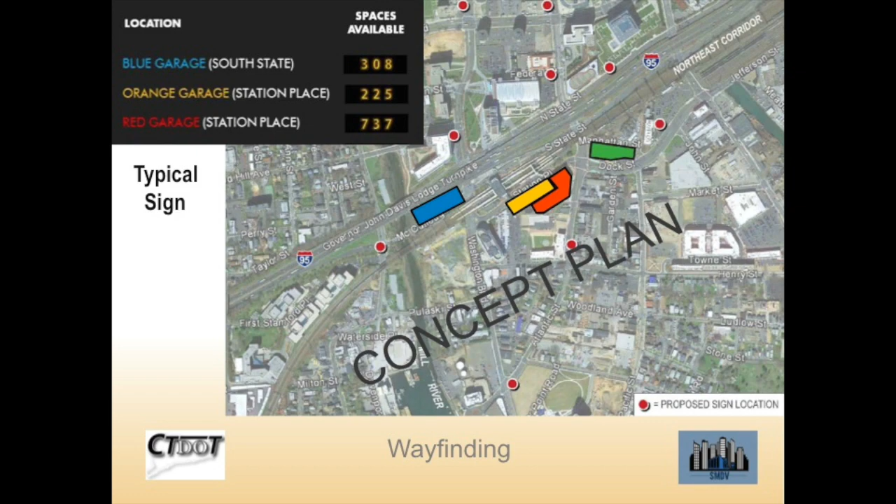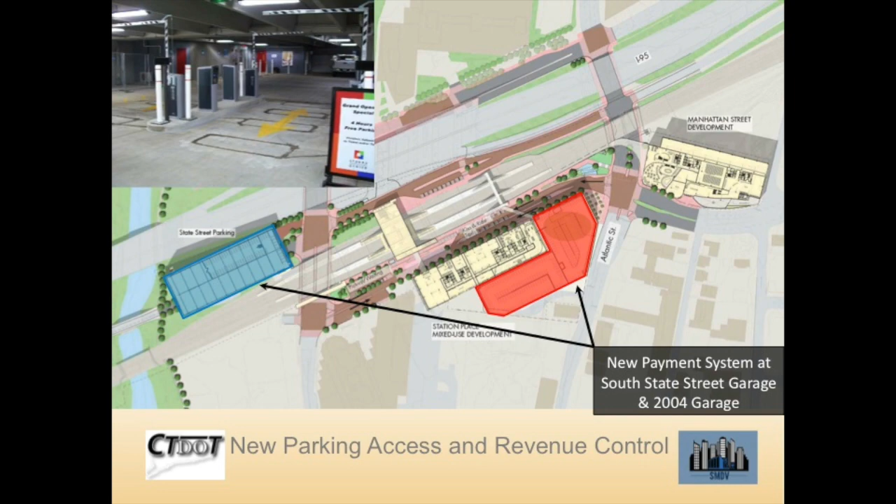There's going to be new payment systems. The system we're looking at is designed and developed by Amano McGann, which is, from what we can determine, probably the best and highest technology in terms of parking systems in the world. We spent a lot of time looking at different systems. We chose theirs, and DOT can speak for what they think of it, but obviously they chose us because of that being a primary consideration.

We believe what we end up doing here is improving traffic circulation around Station Place. We're going to enhance bicycle and pedestrian access, and a lot of what exists today in terms of pedestrian vehicular conflict, I think, will be eliminated in the way that we're going to redo the streets as we complete this project.

We're going to increase the kiss and ride spaces from the existing to 32 spaces, which is about double what exists today. And we're going to enhance the taxi and pickup area. Bicycle storage will be enhanced with 50 new spaces for bicycle storage, and we'll be providing 10 electric vehicle charging stations.

South State Street is going to pass through the garage. South State Street will never be closed during construction. There will be temporary times where I'm sure in the evening there are going to be some inconvenience, but it's going to be minor, and it's going to be done at night to ensure that we're not interfering with commuter traffic at all.

There are going to be intersection improvements made at each of the intersections that are identified here. And these are going to be as required by OSTA.

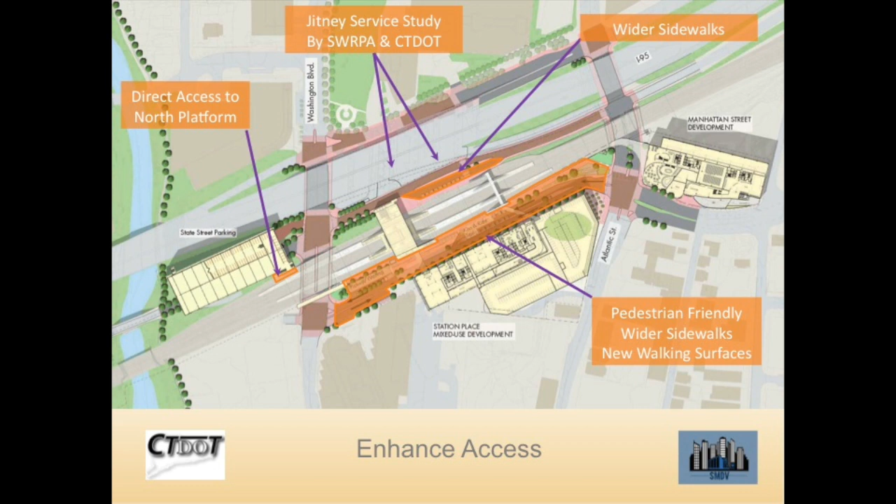Extended kiss and ride facilities will be included on both sides of the station where they are today. Again, both areas enhanced with wider sidewalks, canopies, and up to a total of 32 spaces, which is about twice what exists.

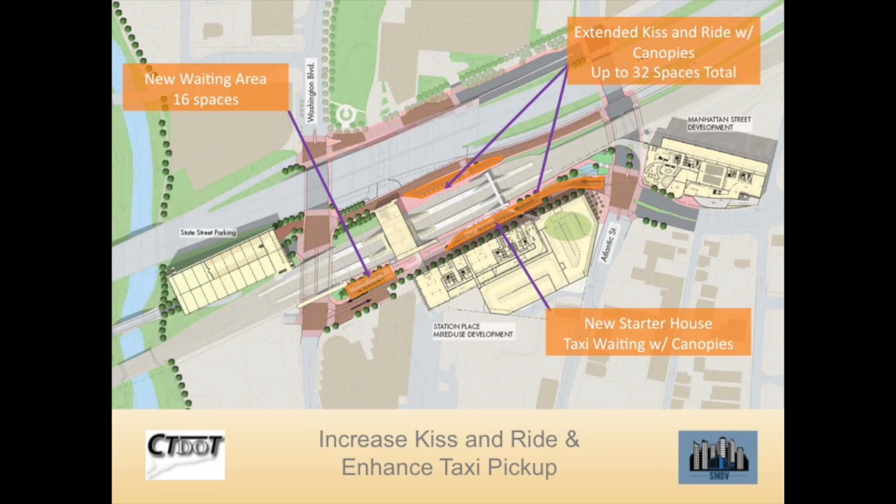We're going to make accommodations for bicycle access to the future Mill River Trail. We don't know when that's going to be completed, but we are clear on the fact that we want to be able to connect directly to it.

And bicycle access to the station in all areas, so that bicyclists can feel comfortable getting in here. As I said, there are going to be 50 new bike stations for them to park their bikes, so it'll accommodate a lot more than what it does today.

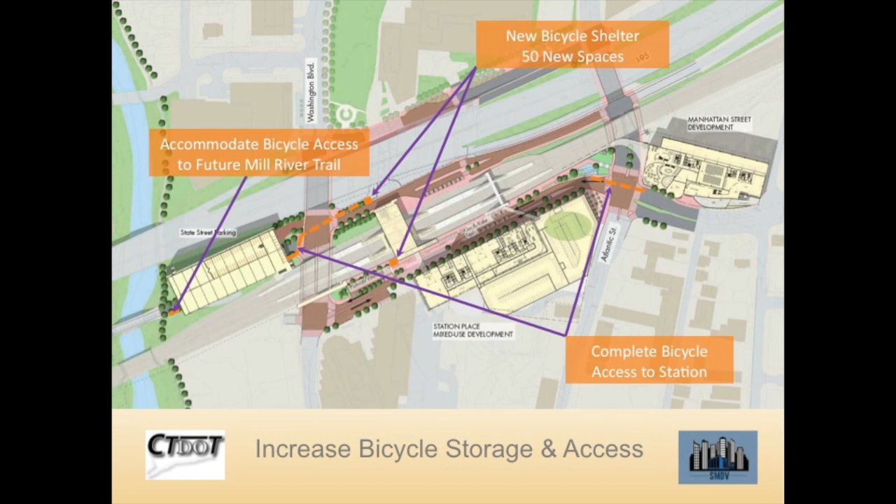Again, the bicycle shelter stations will be in these two areas. Electric charger stations, we're going to have 10 of those. I've talked to a lot of transportation consultants - this is where the market's going to go. There's going to be more and more need for these, and we're going to start with the 10 and see where the demand goes from there.

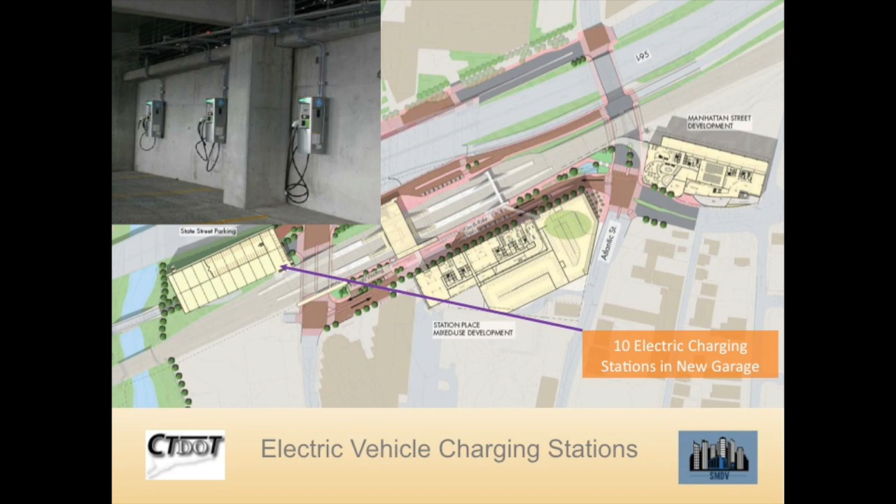Station Place - this is our rendering of what we perceive it to be when it's done. Again, you're going to have 2 lanes of traffic going in this direction. We're going to have raised levels in the street here to mitigate any conflict between pedestrian traffic and vehicular traffic.

And again, along here, this is going to be all retail space. So when you get off the train, walk out here, you're not going to walk into a blank wall any longer. You're going to find active space, and this is meant to be a 24/7 live, work, play environment. We're quite comfortable with the value of this, given the interest that we've received from other developers who are specifically involved in retail and/or commercial space. This is a very attractive area and something they're looking forward to working on with us.

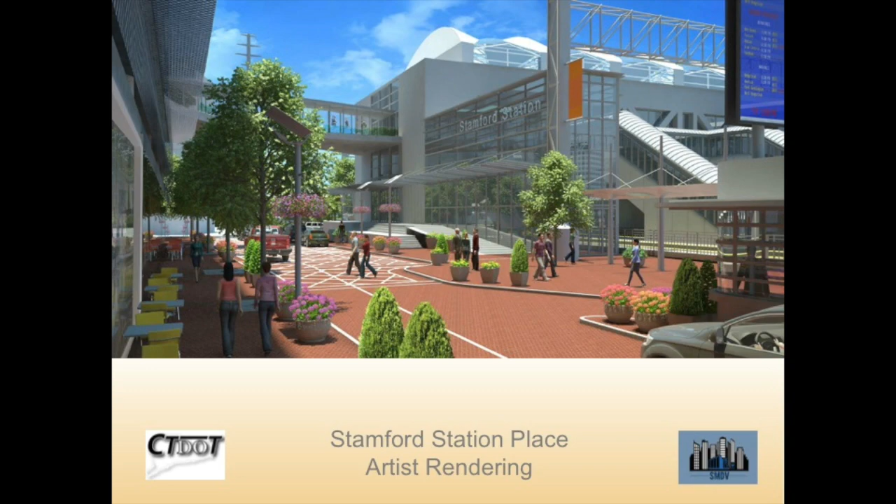These are artist renderings of what we're looking to do. The buildings, as you can see, are in my opinion quite attractive. We spent a lot of time talking about them, looking at them. We want both of these buildings to be iconic. We want them to set a statement for what is the entrance to Stamford in the state of Connecticut, and the exit from Stamford in the state of Connecticut. These will be the first things people see, and the last things they see as they enter and leave Stamford in the state of Connecticut.

The improvements that you see here on the station itself, those are our vision of what it can be and should be. There is no plan in place for that at this point, although we have some ideas that we've been talking with DOT about how we think we can help to get some of this done, but there is no funding in place for that at this point. Everything else you see here is pretty much the way we are designing it, planning it, and marketing it. The only difference being here that we found that we can no longer put a green roof on the South State Street Garage because of some code issues, so that's been eliminated. But everything else you see in terms of the green roofs, in terms of the landscaping, in terms of the quality of the entrance is what we need to do in order to be able to drive the values that we're interested in.

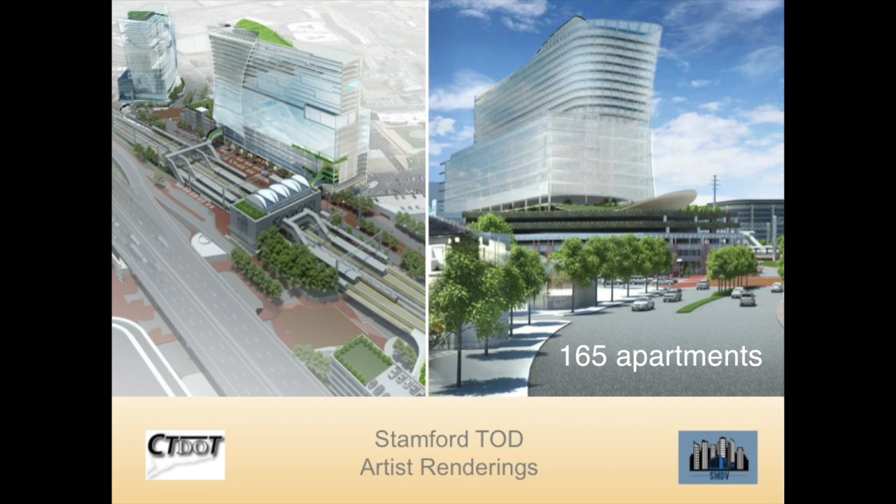Right, so if you look at the TOD building, this building, you're looking at about 30,000 square feet of retail space, which will be along the ground level. Above that, you're looking at about 300,000 square feet of office space. Above that, you're looking at a hotel, about 155 keys, 155 rooms. And above that, 165 residential apartment rental units.

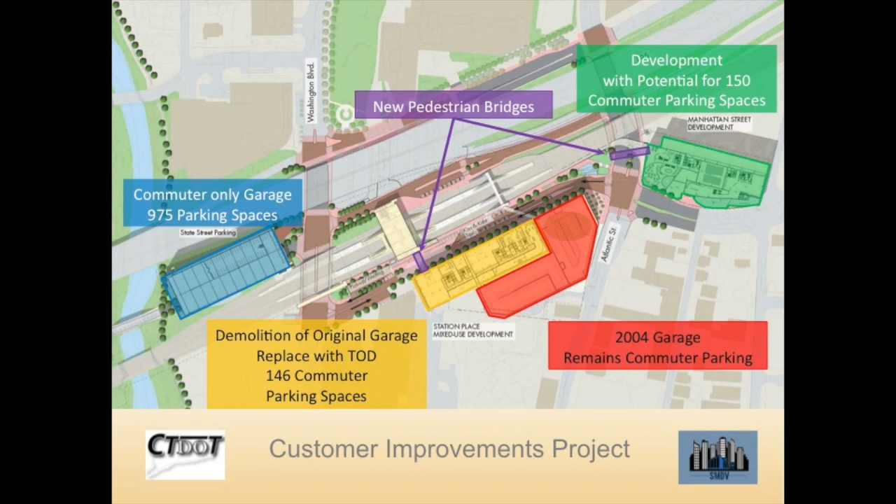Okay, so we have a good amount more traffic drawn to the area, which is great. Actually, if I can just speak to that issue, remember that we're taking 975 cars away from that area. So as we move this parking over to South State Street, you're taking the 727 spaces here and putting them over here. So you're really reducing, in the beginning, a lot of the cars that are coming into this area. That building, the cars that were parking in that building no longer will be going there, they'll be going over here.

But the 165 apartments, the 300,000 square feet of office space, the 30,000 square feet of retail, and the 155 room hotel, I imagine some people will drive to those. So how many spots will you be providing in that building for parking for those tenants? We haven't determined that yet, but it's a conversation we're going to have with the city as well as with the state. And it's our contention that we don't need to have as many parking spaces for office, residential, or hotel as would be required in other areas of the city.

We do believe people are going to use the train to get here. We do believe that people who are coming from New York to work in Stamford will take the train and be working in this building. Some will be driving here, those who live in Connecticut, obviously. We're going to promote the use of bicycles, we're going to promote the use of other public transportation. In fact, some of the potential tenants we've talked to for this building have had conversations with us about the fact that if they choose to go here, they would be looking to financially incent their employees to take public transportation. So this is meant to be a true transit-oriented development.

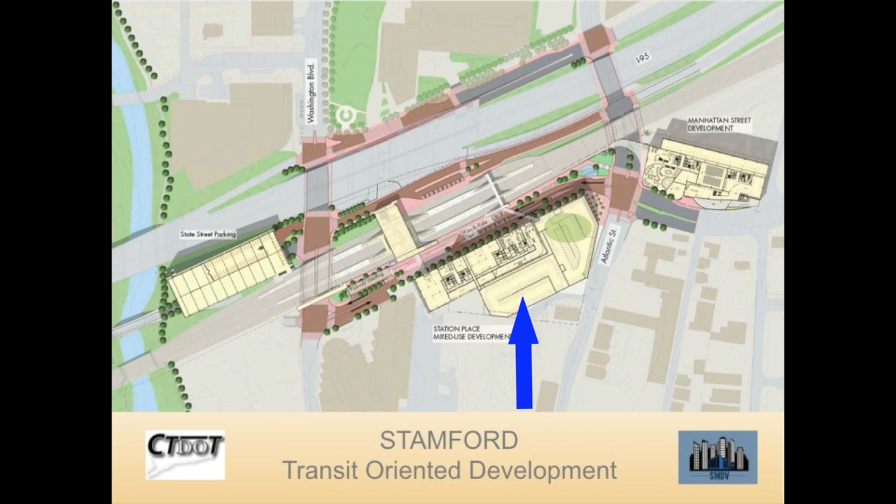Can you put that up? So there you go. We're going to have both entrance and exits out here, as well as coming through the back of where the 2004 garage exists right now, and they're going to be separated.

Right, but from within the 2004 garage, the 1,000 cars that are there, how will they get in and out of that structure? As they are now. We're not going to interfere with them. I come in through the old garage, I don't come in through the new garage. I park in the new garage, but I come in from the old structure.

Right, and I exit through the old structure. That won't be there, right? Front view there. Right, you will not be able to access the 2004 garage necessarily from the front anymore. You'll access it from Atlantic Street.

So you won't go in from Station Place. Atlantic Street has a single lane in and a single lane out, and it only holds about four cars. It backs up into the garage, which is why the current vendor doesn't permit daily parkers to exit there anymore. How would all of that traffic come out through a single lane?

Working with the traffic designers right now, the idea is to have several entrances here and exits here as well, so that they won't interfere with each other. So you lose the spots on the lowest level?

We're replacing every spot that is being lost. So to the extent we lose whatever number of spaces, 10, 15, 20 spaces here, those will be replaced in this facility right here.

So it's not your intention to have any of those people go onto Station Place to exit? Correct. So all the traffic will get forced onto Atlantic to go north or south rather than currently Washington or the other thoroughfares that people use?

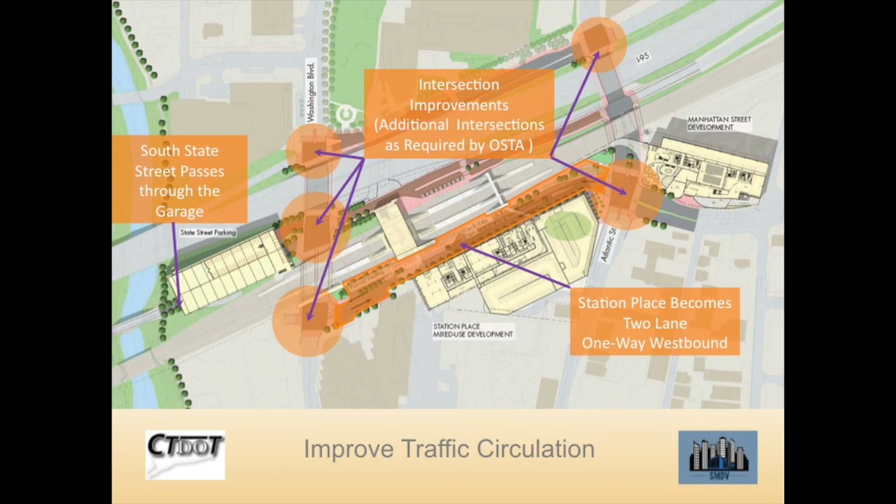There are quite a few bus routes, right? Remember, there's going to be signage out here too, identifying where you're going. Quite a few bus routes right now use Station Place, so I'm assuming the reorientation and rerouting of the bus system is going to be part of this overall. You understand that the traffic pattern and traffic flow doesn't come from us, it comes from the city and the state. This is the city's concept, and we are addressing it. We don't have the right to change traffic on any city or state streets.

So we're taking advice and putting it on a piece of paper, and we've gotten the rationale behind why this works. We understand it, our traffic engineers agree, and we think it works. We're concerned about making sure we have good access to our building, the same as commuters are. We believe, based on what we've been told and what our consultants are telling us, that this does make sense. We'll be working with Connecticut Transit to ensure we rationalize the service properly—we'll be doing the study to do that. Saw that on page 8.